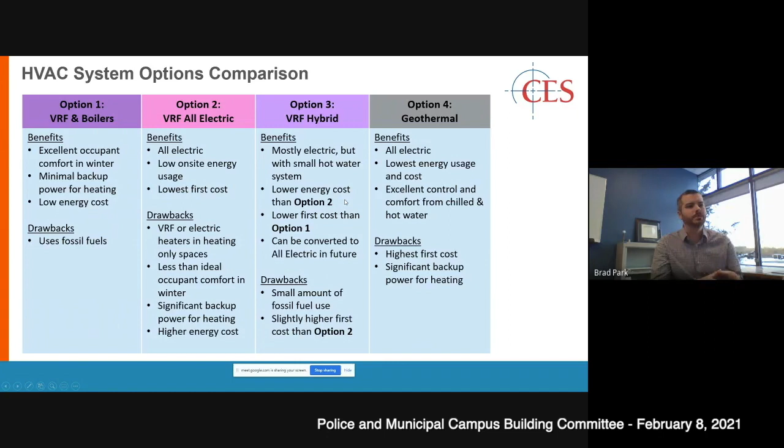We're starting to see some technologies out there where we can look at using heat pumps to produce hot water. The technology is a little bit limited right now. It's popular in Europe, but there's not a lot of availability in the States yet. So we're not quite comfortable yet incorporating it, especially into a public project where you have municipal bidding laws to work against. But 10 years down the road, that technology is probably there. And it's something that could be converted down the road to produce hot water with an all-electric means.

So then, obviously for Keith and some of the facilities department, we look at what major components require maintenance. So we're looking at maintenance against these different options and how that might play into making the decision here. So option 1 and option 3 are very similar. In option 3, like I've said, we still have a hot water system, even though it's smaller and only doing a specific portion of the building.

Option 2, with the all-electric version, you've, again, completely removed the hot water system from the building. So you've reduced a little bit of maintenance there. However, your VRF system is operating more hours per year, so you might be losing some longevity of the system. So instead of lasting 20 years, it might last 15 years because it has to operate more. So a little bit less maintenance, but maybe it has to occur more frequently.

And then option 4, with a geothermal system, there is some additional maintenance. You have an extra set of pumps that have to pump water through the ground. The equipment inside the building can be a little bit more complicated to interface with that geothermal system. So option 4, we would consider having the highest maintenance with that system. So I think you can go to the next one, Matt.

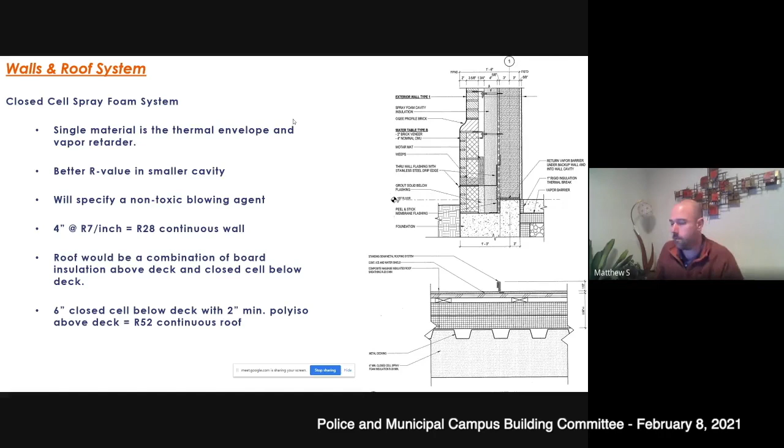It also allows us to reduce the cost of labor by doing that, because what happens with the traditional spray insulation is you're only able to spray a couple of inches per application, because there's an exothermic reaction, and if you spray too much at a time, that built up heat can actually cause an ignition. So this eliminates that risk by using a non-toxic blowing agent. So that's the system we're going to be using going forward.

We've also started looking at some of the roofing systems. It seems like it's the preferred method to go with an EPDM roofing system for the flat roofs. This is sort of tried and true. It's been used for 40, 50 years. So we're going to continue with that. And it has a long lifespan and is easily repairable within the town. So it's a good tried and true system.

And for the sloped roofing, we're actually looking at not using asphalt shingles, because we want to go with something that has a little more of a lifespan to it and gives a little bit more value over the life of the building. So we're actually looking at a material that has a shingle look but is actually metal. So it's an interlocking metal shingle. And the bottom right is a couple of examples of what that can look like. It can have sort of a traditional asphalt shingle look. And it can also look sort of like slate tiles.

The option on the right is more of your traditional tile look, and the one on the left is sort of an elongated slate roofing look. So more to come on that. We're getting some samples pulled together that we'll be able to share. But this will give that traditional look and fit with the campus while also giving a little bit more robustness to the roofing envelope system and longevity.

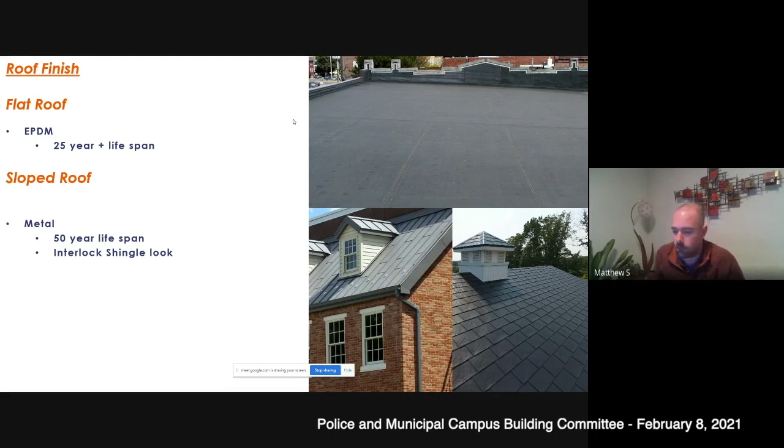So just want to briefly touch on a couple of plan updates that we've been going through as we've been moving through this past month and really refining the plan and getting ready for design development. On the ground floor, this is sort of the south portion of the building, what we're calling Area A. We've really just been filling in the details, getting some of that casework brought in, working through some of the interior design of some of these spaces.

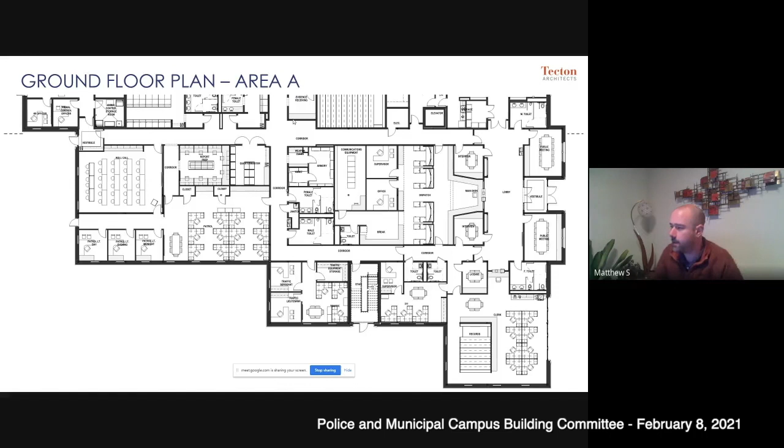We are currently working through some design revisions to the dispatch area to try to get some more flexibility in the potential for future regionalization of dispatch and the ability to get more workstations in there, whether it's now or in the future. So more to come on this. We should have some updates to that for the next meeting.

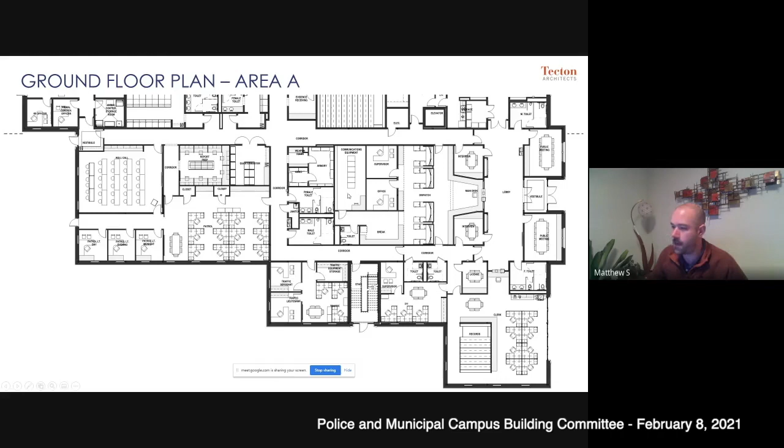Area B, we have had some changes in working with the department and the working group. Some small pieces of it is we've reshuffled some of the garage components to get a maintenance storage garage. So this will have lawnmower, snow blower, things like that that are going to be dealing with site maintenance around the building. We've also added a small bay that could be dedicated to vehicle maintenance where we may include a vehicle lift.

In the fitness area, we're starting to refine how some of this is going to be working, including one of the program elements that we were developing, the firearms and de-escalation training simulator. So we're actually dedicating a space to that. That's basically an immersive 3D environment that uses projectors and screens and an instructor to really simulate live scenarios that you would experience out in the field.

And it really helps bring the department into the 21st century of policing. So this is a modern technology that we're starting to incorporate in a lot more of these facilities. We'll be bringing some of that information to the committee as it develops. To the Sally Port, we've added a bulk property room, which would be an expansion of evidence. So when they're bringing in bikes and things like that, it doesn't necessarily need to be in the main evidence storage area. They'd be able to have that bulk property stored out here.

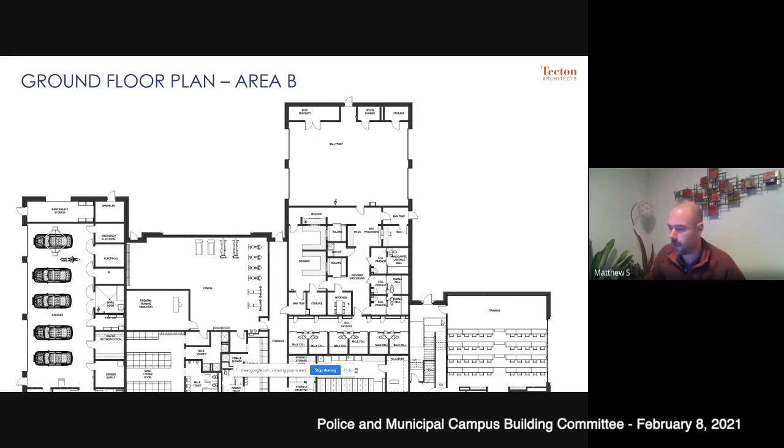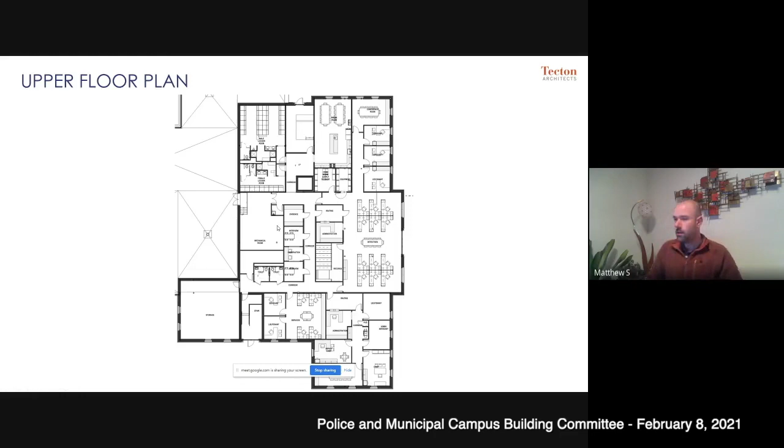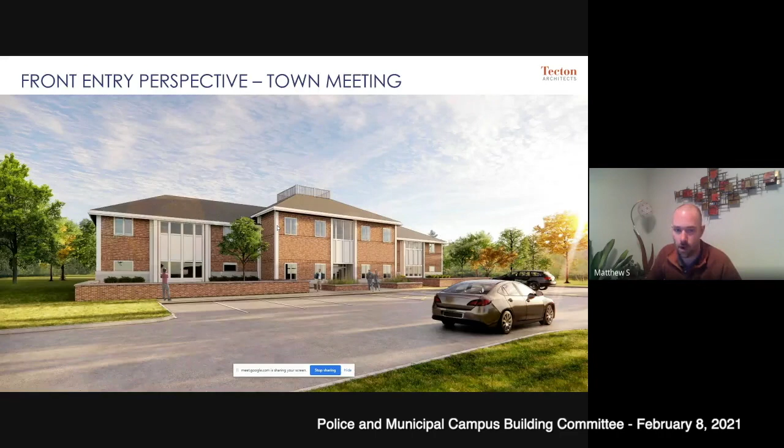Other than that, nothing else has changed on the second floor. Just a little bit more development going on in the mechanical areas. And now that we have our system selection, this will start to get refined and detailed as we move forward. So a little bit on the design, we've progressed. Just as a reminder of where we've come, this was the exterior perspective that was presented at town meeting in the fall. We then further developed that for the previous building committee meeting in January, and this is where we got away from that white trim and more brick detailing around some of the larger windows and entry.

We've received some comments on this, and we've wanted to refine this a little bit further and balance the fenestration, the windows and openings, with some of the interior spaces. And so we've had many, many design meetings on the building facade and incorporating that with the way that the site plan was starting to develop. And so we've moved a little bit deeper into our refinement, and I'm gonna stop talking for once and turn it over to Tyler, who is going to walk us through the latest design iteration.

And once we go through these slides here, which includes the study comparison that we've brought back of comparing this massing on site, we're actually going to go into a live 3D walkthrough that we can go around and see all the different components as they come together live. So that'll be a new thing that we'll start doing more often with this committee. Tyler? Thanks, Matt. If you could actually go back to the previous slide quickly.

So looking at this old iteration that we showed you about a month ago, there were a few things that weren't quite working as well as we would like. And the biggest one is hierarchy. Having a clear sequence of hierarchy is definitely really important when the architecture is more on the traditional style or traditional design. And the wings on either end of the main entry felt really heavy and tall. So we needed to think of a way to lessen the scale of those, so you have more of a hierarchy of that main entrance in the center, and the wings can be smaller and not as pronounced, and complement the entry.

We also realized that some of the brick detailing we were doing in here, in concept, ideally those stepped brick surrounds would provide some contrast between the main entry and the flat brick walls. But when we looked into it further with rendering, it wasn't providing that contrast that we wanted. So if you can go to the next slide, we attempted to start to resolve some of those issues.

First, you can see on the wings on either side of the entry, there's a horizontal band at the top. It looks like darker brick from this rendering, but as I'll show you in the 3D walkthrough a little closer, that's actually a revealed brick. Every other layer of brick is inset about 3/4 of an inch to create a textured effect that helps break up the two wings on either side of the entry, to really emphasize the center of the building rather than that whole elevation.

We also changed the brick stepped surrounds to a precast concrete surround that added a little bit better contrast between the brick and the entry. It's also a little bit sleeker, slightly more modern, but I think it complements this building and the rest of the buildings a lot nicer, especially because there's a few precast elements on the town hall as well.

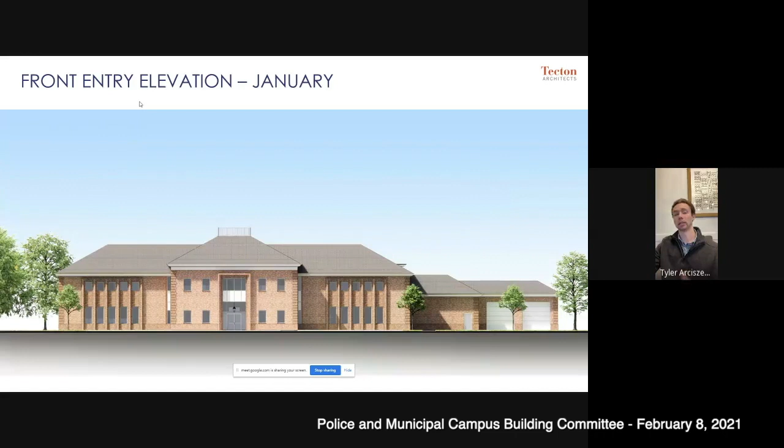We also added a bit more detail into the windows. We added some brick detailing at the sill and the head, as well as some thicker and slightly deeper mullions and vertical fenestrations. Also on both the wings, actually, Matt, if you can go back to the previous slide. The brick surrounds went full height on each wing. And on the new design option, we brought that down to a single story height, again, to create a better layering of hierarchy between the entry and the two wings of the building.

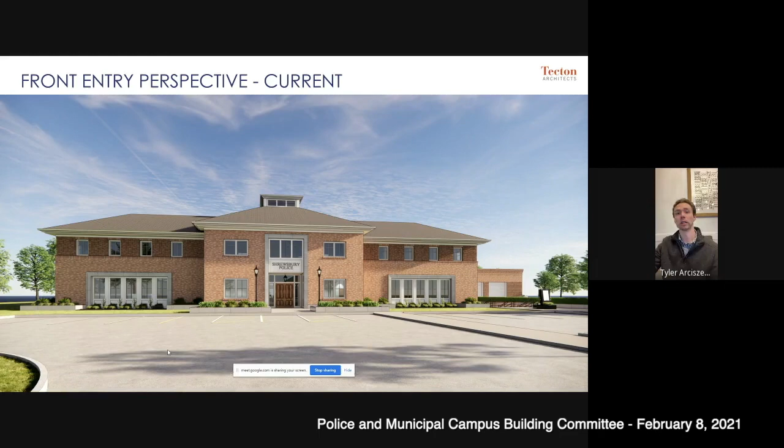We also started to develop the site a little bit more. I'll explain that more in the 3D model, but we added some planters in the front entry, along the perimeter of the building, and we developed the plaza in this image on the right-hand side of the building. But again, I'll get into that further in a 3D walkthrough.

So these are a couple of site comparison elevations. The top one, you're looking at the main entry elevation of the town hall on the right and the new police station on the left. As you can see, the floor-to-floor height of the new police station is definitely higher than the town hall, but the overall height of the buildings is actually pretty similar. So if there's any fear that the scale of this building is much larger than the town hall, I think this shows that it's working quite nicely.

It should also be pointed out that the one thing we're not showing here is a little more detail that actually makes this a little taller, but the police station is going to be set back as well, so it'll appear lower as you're coming around the site because of that. Right, and then the bottom elevation is a site elevation looking from Maple Ave at all of the buildings on campus.

Oh yeah, there's the aerial. Like I said before, we started to add some more detail into the landscaping with some of the planters in the front entry and along the perimeter of the building. We also added more detail into the plaza that will act as a bit of a break area for the police officers and staff of this building, but also as a spill out space for any event going on in the training room that's right at the lower floor of that wing there.

If you look up to the top left area of this image, we started to develop a community outreach landscape grove area where it runs along Maple Ave. It's a way to start bringing the community in a little bit closer to this police station and create a nice interaction between the people of Shrewsbury and the officers that work here. There's a great opportunity to get some community involvement and outreach into this area with picnic tables and benches and just casual outdoor space.

So I'm going to stop sharing. Tyler, do you want to pick up the screen share? Sure.

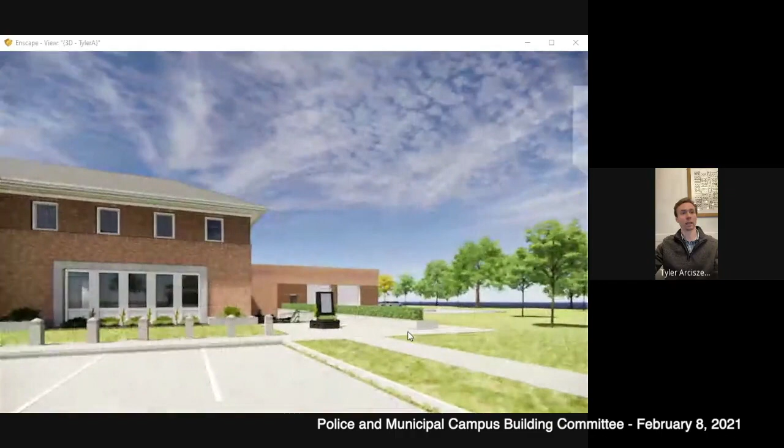I'll walk you around to the plaza area. But we've also identified a nice location for a police officer memorial that we might want on this campus, and that's right here, right in front of the outdoor plaza area. And we're still working through the design of this plaza. We might have some more integrated landscape features and some step seating as well. But this is just to give you an idea of the size of that space and how it might work.

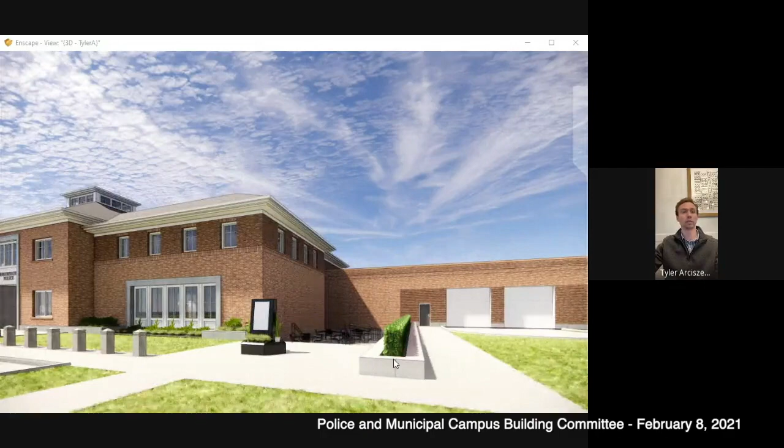We also have this planter wall here to separate the plaza from the prisoner release area here, so that way those areas are visually separate and disconnected. I'm going to actually go to more of an aerial view so you can get a better sense of the whole site.

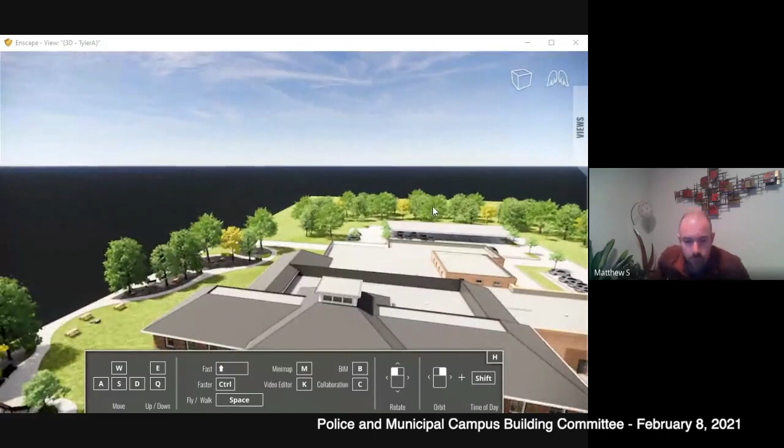As he's pulling back here, one thing you will notice is the area over the fitness room, just below where his cursor is, has popped up a little bit higher than the rest of the roofs. We've increased that volume a little bit and added clerestory windows around that. So I think it's a great opportunity to get some natural light into that space because it's so deep and large. Right. We've also simplified the roofs a little bit on this 2-story volume to get all of the roof lines to clean up and work nicely together.

We've been going back and forth on the various ways we've been treating the top of the front entry roof. And we've sort of settled on this clerestory kind of cupola design that sort of nods back to the town hall, but has its own identity. And the nice thing with this is it's right above the middle of the Detectives Bureau, which again is one of those really large, open, deep spaces. And we're able to take advantage of that natural light, filtering it down into the space itself. So we're actually going to be building that out of all structural steel and having it open all the way up to the ceiling. So that'll be a nice, large, open space.

Right. So the back portion of the building, where it's all 1-story, we simplified the roofs there as well and left them all as flat roofs with a parapet. And that, I feel, helps provide, again, a little bit more hierarchy to this main portion of the building here, and lets the back of house section of the building fade a little bit to the background, not be as much up front.

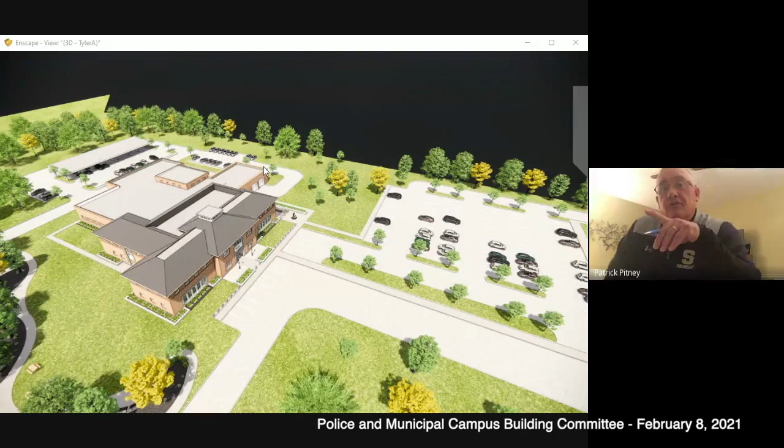And I have one other. Mo, I'm going to ask you to jump in on this. This public area that's going along Maple Ave, is this the area that you were talking about that we have on the agenda, the outdoor seating area addition? Has that been incorporated into your thought? Yeah, that's basically what I was thinking, Pat. In my discussions with Keith and Kevin Mizikar, I think we were thinking it would be a little more treed than that.

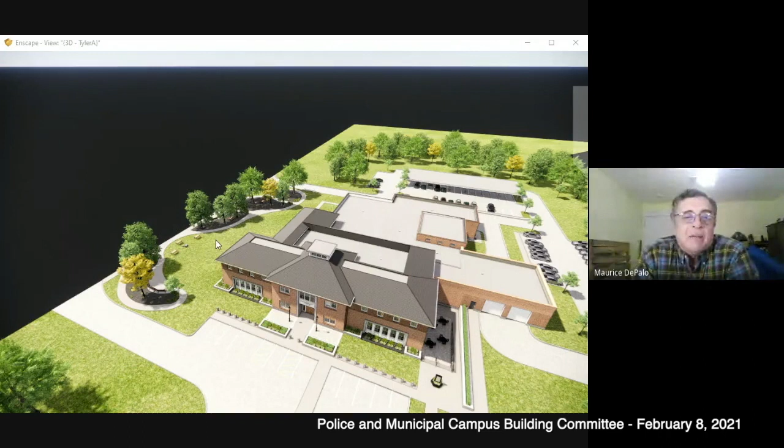I mean, if Keith is okay with the amount of grass because of the maintenance, it'd probably be okay. Personally, I'd like to see a few more trees, like behind those picnic tables where it bumps back up to the road. I was thinking more of a grove effect, but no, I think it's good. If he's fine with the amount of grass and everybody else likes it, that's fine. That's basically what I was talking about. And this is also our first pass for this grove design, so it'll go through a little more development with the landscape architect as well. Yeah, we were trying to get this done very quickly. It takes more time to model trees than it does grass.

And Mr. Chairman, Angela's on here too, and she may or may not back me up on this, but grass is much easier than all that mulch. So that would be a maintenance concern if that's all mulched area, more than the actual grass itself. But I also do think that, to Mo's point, possibly more trees. But I understand your modeling part of it.

Okay. Well, I think that will be developed as time goes on. I just wanted to make sure that this was the general idea that we were talking about on the agenda item, and that it's been covered to a certain extent. Mo, are you happy with what you see thus far to this point? On the seating design? Yeah.

Yeah, sorry, I had to jump up for a minute. There's 5 grandkids over here.